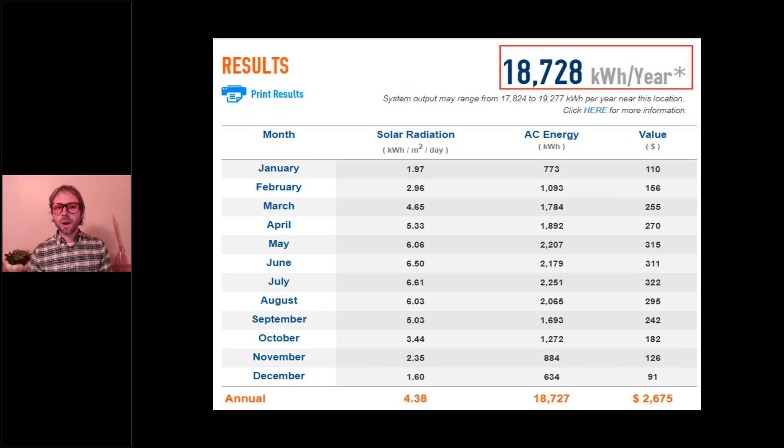Then you work backwards from there to figure out where you need to go with your energy efficiency. And then, of course, you're probably going to send someone out to the site to use a solar pathfinder and figure out the best placement for renewables, to avoid shading or having to kill trees. And for geothermal, you're going to look at, if you're using geo, where's the best place to put it. Do we want to kill more trees by going horizontal, or bore down vertical? It costs a little bit more. Are there some ponds? What's the best thing to do? So you're going to assess that site for solar income and potentially for geothermal energy.

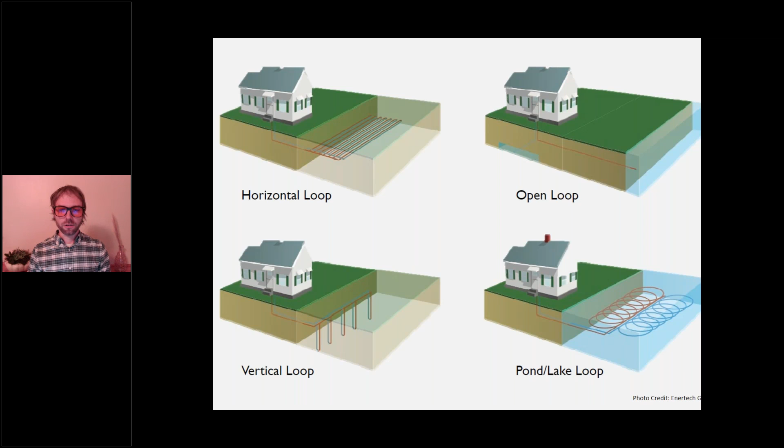Now you've got the team together, you've got solar looked at. Now you're going to look at passive solar, right? Befriend the sun.

This is a really exciting project, the Burbeck at Beacon Springs, a certified Living Building Challenge net zero home. I just saw their data - they're definitely way over track for net zero, still to this day, so many years later. I saw a Facebook post update from them in 2018 during the polar vortex. I think it was -13 outside, the sun had come out, and the picture had their window open because they were overheating in the house. That's what happens when you build a nice passive solar home with the right products and solutions, in the right design - you can get that heat from the sun during the winter and you don't even need your HVAC system.

All right, and keeping on design, we need to design right-sized spaces. That's what we're seeing more of, right? We're not talking about tiny homes per se, but how can we ensure people can maximize the effectiveness of their space and not have to use too much, which cuts costs and materials as well.

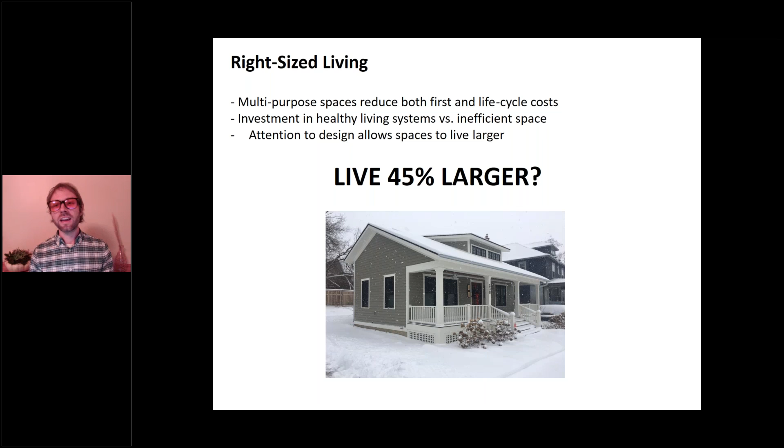So before, we just talked about design, right? Just getting the team together and having better informed design decisions. We didn't even get to anything yet, and right there alone, you can save so much energy and money on utility bills before we even get to the high performance products.

So this next tip, number 5, is what we want you to do: when you're setting that goal for zero, also set a secondary goal of hitting Passive House certification - US, German, international, whatever you like. Set that goal and be prepared to fail a goal, and be prepared to say that's okay. It's okay to fail Passive House. You want to put it out there and set it as a big target, and go as far as you can to try to hit it if you possibly can. It's better this way - if you set a lower goal, you're going to fall even lower.

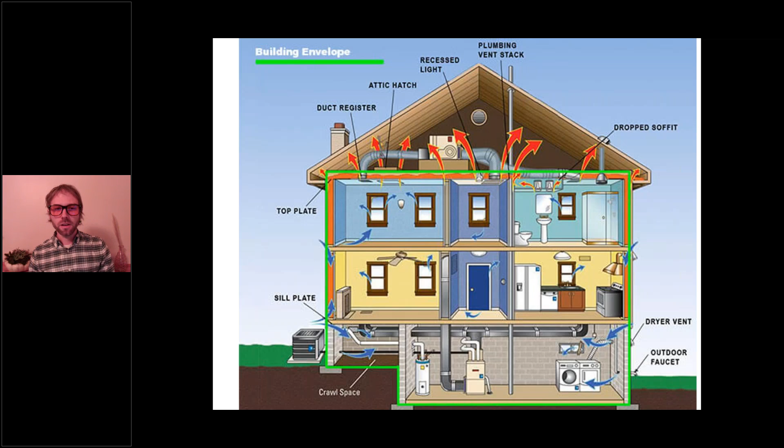So when you set that higher goal, you're going to have better air sealing in the house, better strategies to air seal and keep that energy in, better roofing and attic insulation, better insulation in your walls with thicker walls, and slab insulation that's properly installed.

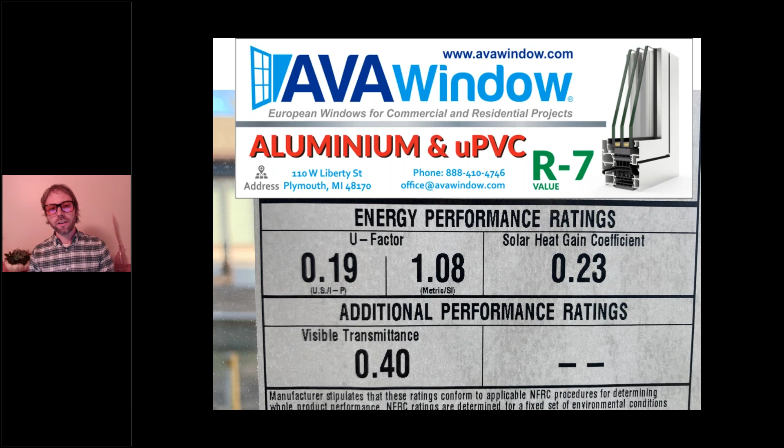You're going to have the best windows with either the lowest U factor, or now the trendy thing is to talk about R factor, right? R value, R5 windows, R7, R10. We're seeing them out there.

And you're going to start to use advanced framing techniques. So you've got traditional framing, we got a lot of lumber. Now you have less energy, less money. Framing's expensive right now, wood costs are way up. Using something like our friends from T-Stud, you can put that insulation right into the stud and insulate it right there and stop that thermal bridging.

And then, of course, you can know now what air sealing targets you want to get to with new products on the market. This is a photo from one of Architectural Resources' projects that was presented on Monday. This is behind the scenes footage of it getting sealed through a sealant, an aerosol, getting it down to the air change level they want it to be at. You don't need to guess at air changes anymore, you can just get it there.

So the other thing you have to consider with insulation, of course, is: is it healthy? And what's the upfront carbon of it? We had a discussion about that at the beginning of the session too, that you can catch the recording of now. So not just how much energy does it resist, but is it a healthy insulation? And also, is it a lower carbon emitting insulation? Consider all that when you're putting your team together at the beginning.

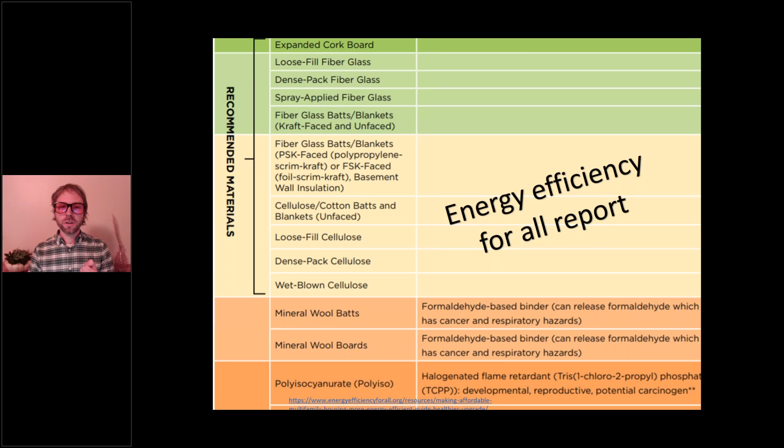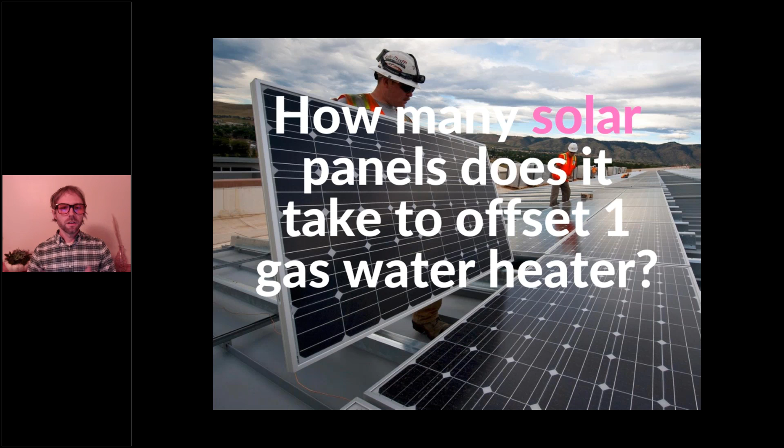Now, electrification, that's what we really need to start aiming for. How many solar panels does it take to offset one gas water heater? One, two, three, five, ten, what's the answer? And the reality is we can put up a thousand solar panels, but we can't get that combustion back, we can't get it out of the air.

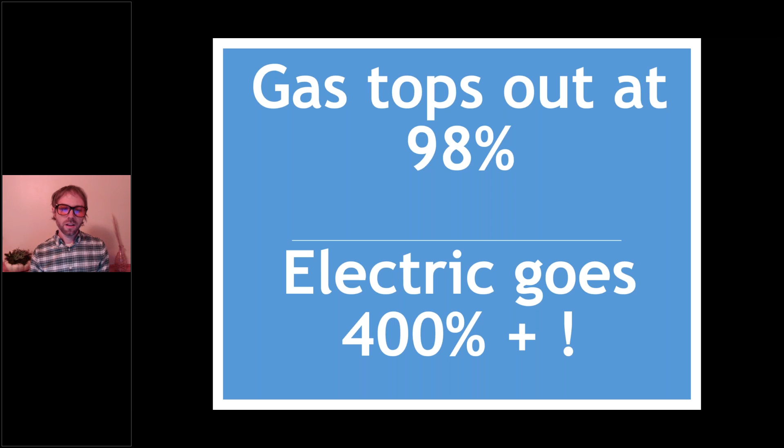So it doesn't offset it. That's why we need to go electric. And gas just isn't innovative anymore, it's really hit its peak. But electric systems, as you saw yesterday at the session, 400% efficiency, 500, 600, 700, they're still going up. There's still more innovation. So that's what's happening in the realm of electricity.

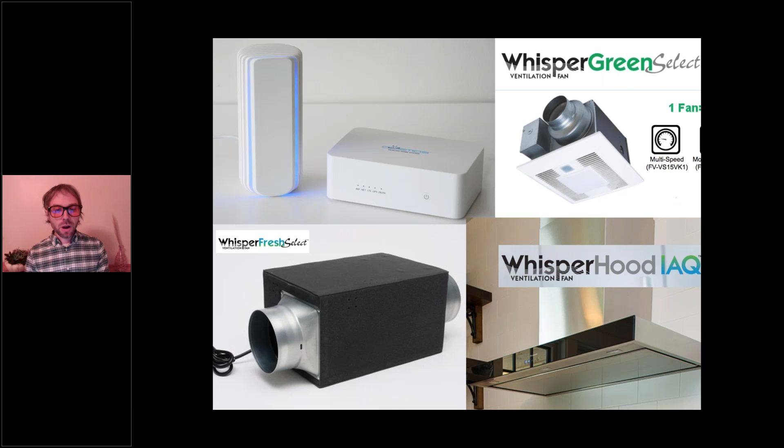Now, if you follow everything I just talked about, you're already at 90% reduction in energy use. Now you just got to get really picky. And unfortunately, a lot of people start here, but you can only save so much energy here because there's only so much energy being used.

The biggest thing is to go out and get your clients to try out a single hot plate induction stove. You love cooking, you love gas, but you know it wastes energy and you know it's poisoning your house. So electric stoves save more energy, have less toxic emissions, but they're awful to cook with. Get that induction stove, try it out, tell us that you don't like it. Send it back if you don't like it. But this is a great way to save energy, and all the top chefs are switching over to it now.

Next, you want to be looking at your dryers, going all electric, using heat pump condensing dryers. They build in motion sensors into LEDs now, and so I have these, and it's built right in, and it's cheaper than the wall-mounted motion sensors.

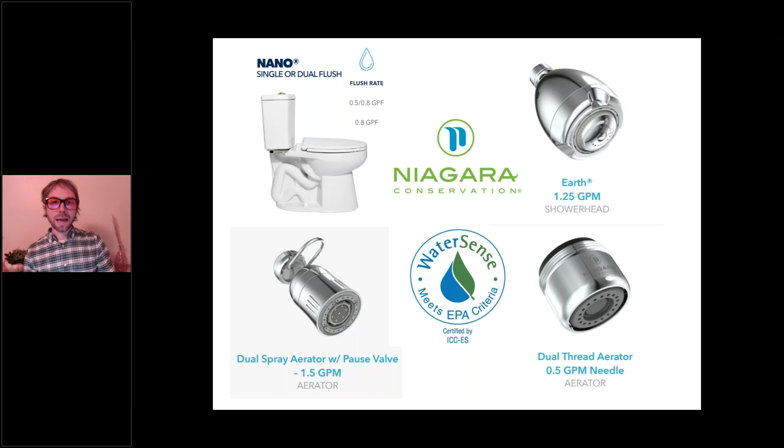And then make sure you're getting water sense products, because then you're pulling less water out of the water heater. These products still work just fine. And on the toilet side, if you've got well water, you're using energy to pump that, so that's going to save water and energy. Or even in a municipal setting, it's going to stop energy being used back at the plant and reduce carbon emissions that way. So that's a win-win.

Because now you can work with energy modeling professionals at the beginning of the project. Legally, in most states, you have to work with one of these folks anyway, they have to come and test your house out. So why not work with them at the beginning, when they can tell you you're on track to making your net zero goals, rather than the bad news they might deliver after construction.

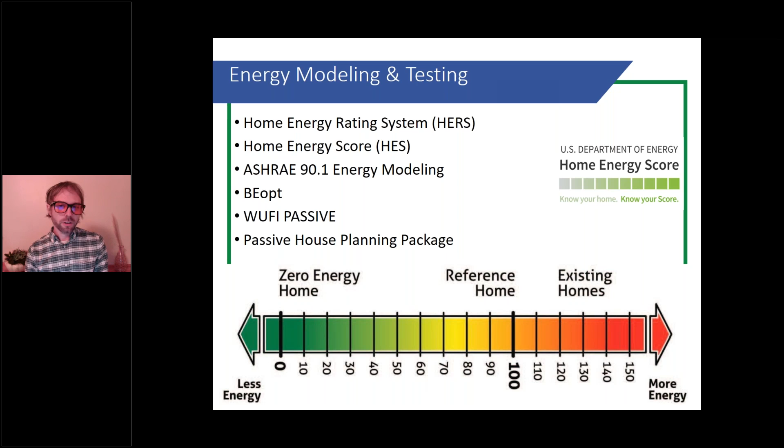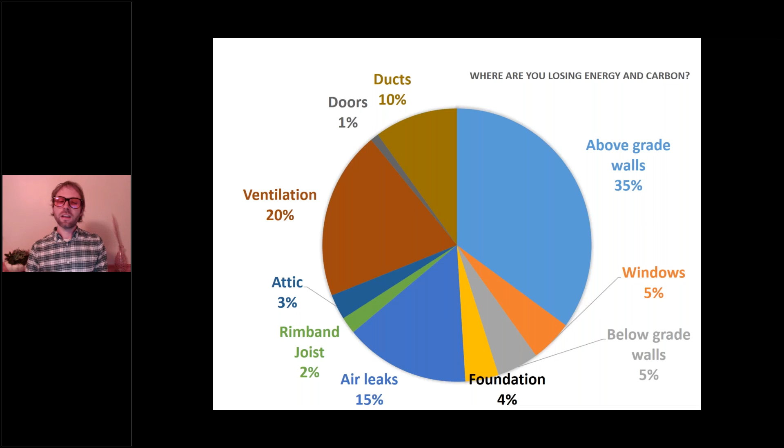So you're going to work with them through one of these various energy modeling softwares. This model is going to say, look, here's where your plan is today, but if you improve your house, improve your plan, here's where you're going to be at, here's your cost, here's your energy usage. During the design stage it breaks down where your energy is being wasted, so you can figure out where to put your effort and your money strategically, rather than learning this at the end of the project when it's too late, because we see that every day and there's nothing you can do.

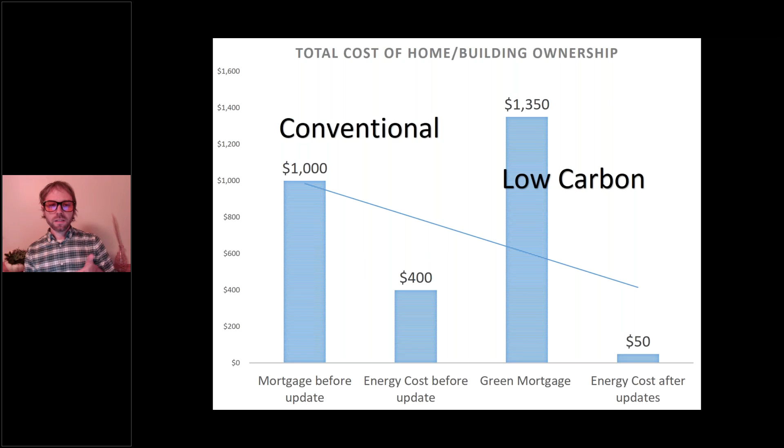So you can use that modeling. Get the modeler in, they come and do some of the work throughout the house, inspecting it, testing it, and giving you a report telling you you're on track to saving energy. Now is the time to cut energy bills, or now is the time to add solar, so you reduce your energy.

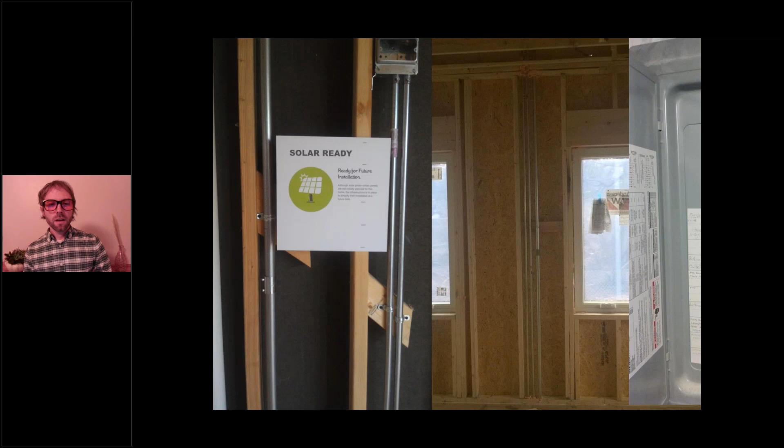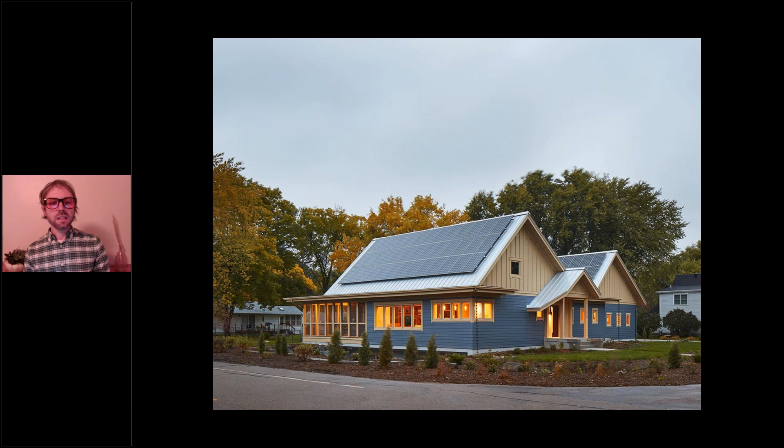You might want to pre-wire for solar, get the right solar so it's ready for the future. If the clients don't have money now, they can add that solar onto the roof later, or add more solar later, or put it out into a field. We're going to be talking about solar next. You're only going to need a little bit of solar to hit net zero if you've done those other things.

And then you can put a battery in as well, and consider having 100% uptime and save money with a larger battery. Lastly, if you can't purchase solar, this is a great time to get renewable energy credits, or RECs, and you can go zero carbon that way until it makes sense for your client, or for you, to actually buy the solar, or do some kind of hybrid strategy. But you have to make sure that the RECs are certified.